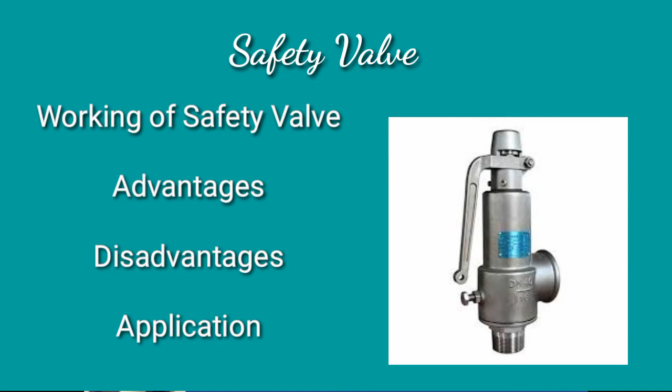In a previous lecture series we had seen what is a safety valve, how the safety valve is working, what is the application of a safety valve, and what is the difference between a safety valve and a rupture disc. In this series now we are going to see what is a relief valve.

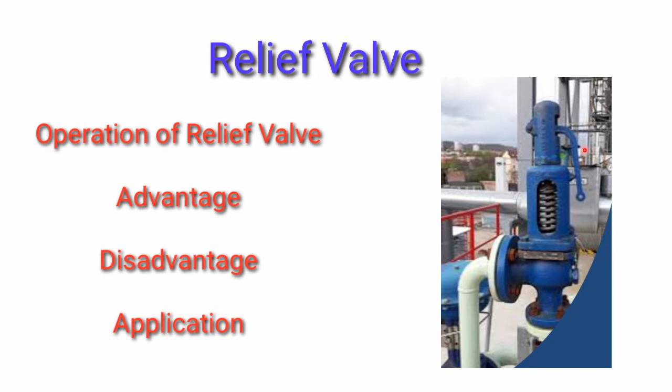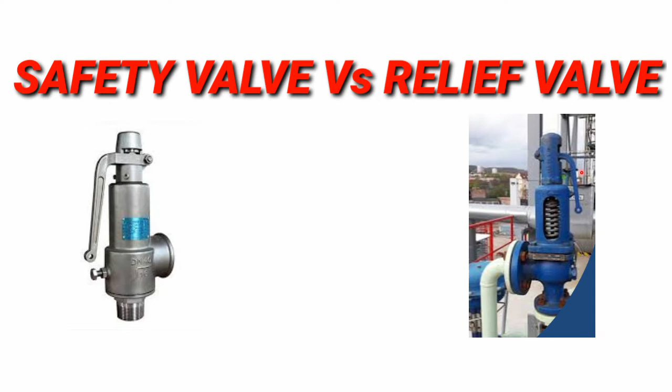We will see what is a relief valve, how it is operating, what are the advantages and disadvantages, and most important question, what is the difference between the safety and relief valve, we are going to discuss throughout this video. At the end I am going to explain it all in detail, but as we proceed I am going to tell you a few points about the difference. So please watch the video till the end. Let me start with this.

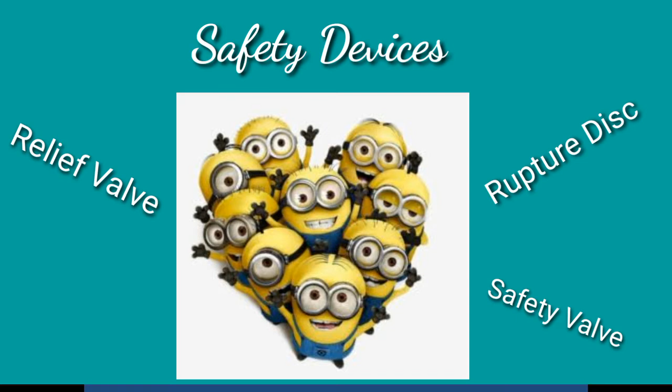What is a relief valve? A relief valve is also like your safety valve, which is reacting to overpressure. So basically the rupture disc, safety valve and relief valve belong to the same family. But the reaction to overpressure is different for all three components. So how is the relief valve reacting? Whenever overpressure is there, it releases the overpressure gradually.

What I mean is, in a safety valve, the pressure suddenly pops out into the atmosphere, and when it comes down to just below the set point, the valve gets closed. But in a relief valve, it is gradually opening and releasing the pressure, and then it is gradually shutting down. This is the main difference between the safety valve and a relief valve.

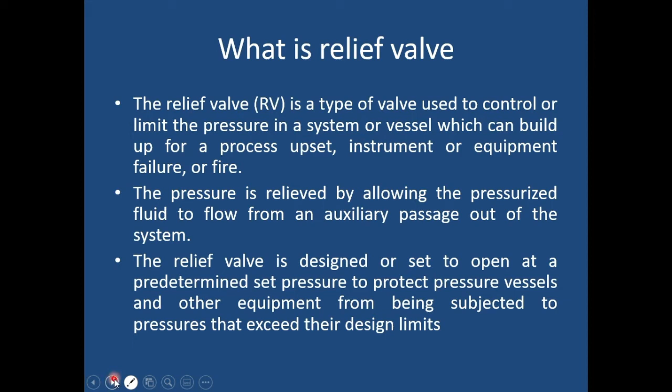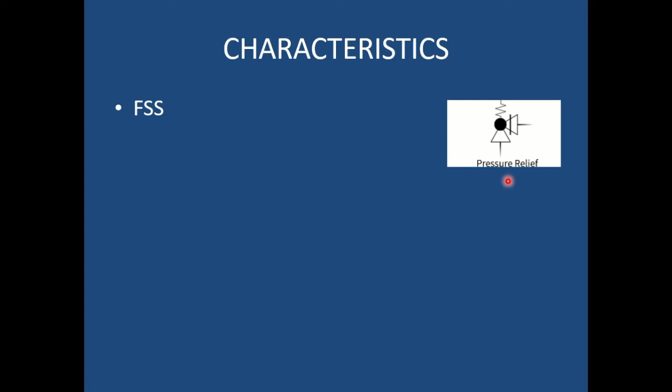Next we will see the different characteristics of the pressure relief valve. First we will see the flow sheet symbol. This is the flow sheet symbol for a pressure relief valve. Now we will see the different types of relief valve, that is conventional spring loaded, balanced spring loaded and pilot operated.

The cost ranges from 20 rupees to 35,000 rupees. Yes, you heard me, it is from 20 rupees. Because if the size of the project is small, small types of relief valves are also available, ranging from 20 rupees. And if the pressure handling capacity is more, or the sensitivity of the pressure handling is more, then the price rises to 35,000 rupees. I got this price from IndiaMART.

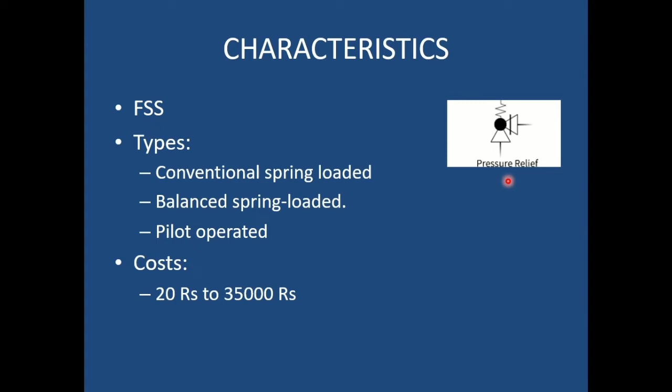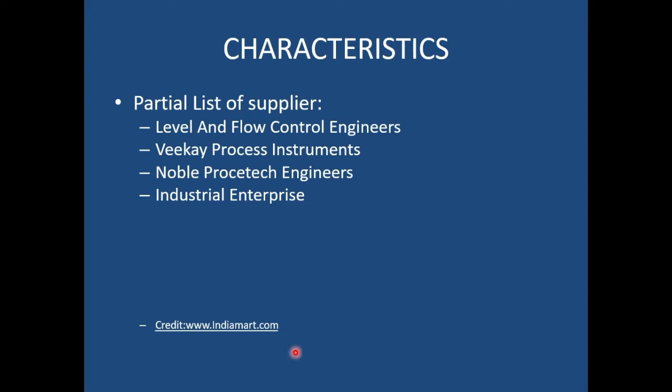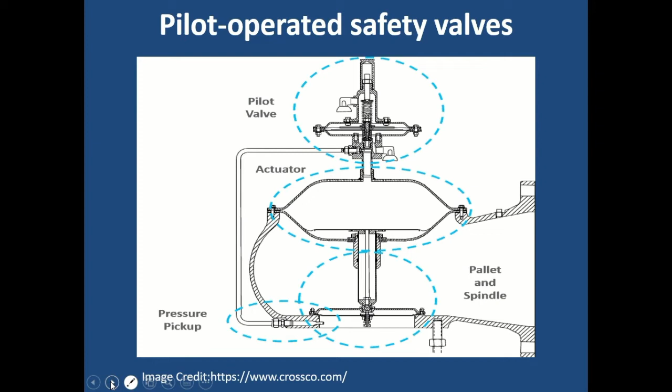First we will see the closed position, which is very easy to understand for the relief valve. Now this is the closed condition. Pressure is input from a certain vessel or equipment where it is connected. As long as the pressure is less, the pressure will be applied here through this pressure pipe on this diaphragm. So if you want to open this control valve, you need an equipment pressure more than this diaphragm pressure. Only then will your valve open into the atmosphere.

So how is this taking place? See, when the equipment pressure rises above the diaphragm pressure here, it will start lifting the disc.

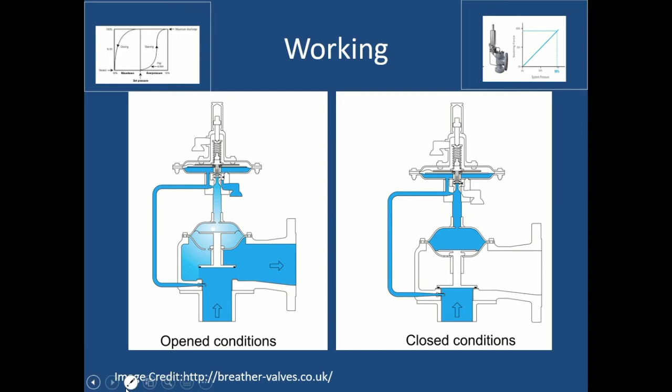As it's lifting the disc, the liquid available inside the equipment will move out of the valve. I can explain with the help of the graph. If you show the pressure profile of the control valve, it will always add an advantage to your recruiters as well as in your exam.

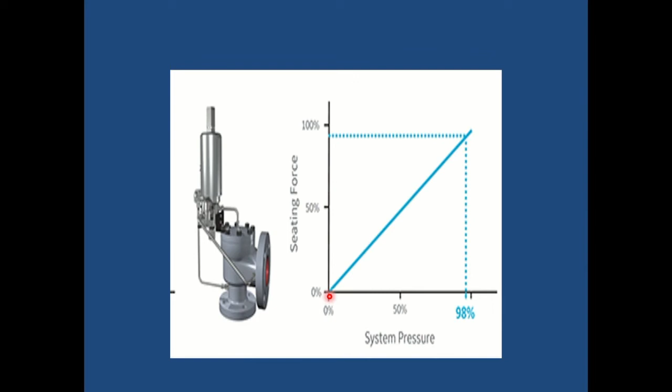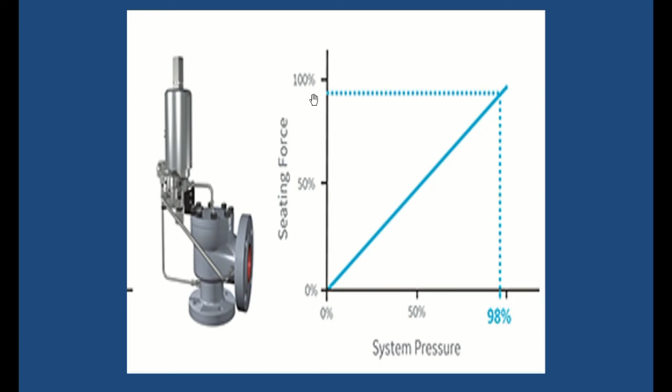The graph is drawn against the seating force versus the system pressure. As your system pressure increases, the seating force will automatically increase, that is, it starts lifting up as your system pressure is increasing. If you observe, the curve is linear, a complete linear curve. At almost 98%, you are getting a 98% opening or seat force.

This is another profile which is drawn for the relief valve. We can explain that this is the set pressure, and this is the lifting of the control valve taking place. At the initial position, the set pressure is less, so the lifting is also 0%.

As your pressure starts increasing gradually, suppose the pressure increases above your set point, that is a pop action taking place. At that time, if you observe, the lifting is also taking place. As your pressure increases, almost linearly your lifting increases.

When maximum discharge is taking place, remember the complete action is gradual, it is not a sudden action. So as the maximum discharge of pressure is taking place, that time the maximum seat opening is there, that is 100%. When maximum discharge takes place, the pressure will now start dropping down.

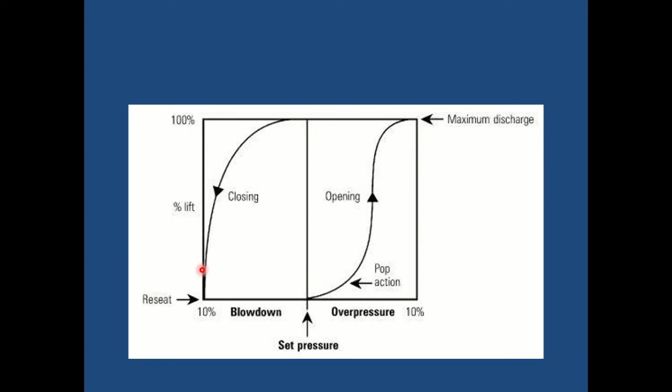It will come to the set point and start dropping down. As it is dropping down, it is closing the control valve at the same time. This is the pressure profile of a relief valve.

More options for controls are available. Some designs allow changing the orifice sizing and the main valve. That means different design features can also be part of this complete relief valve design.

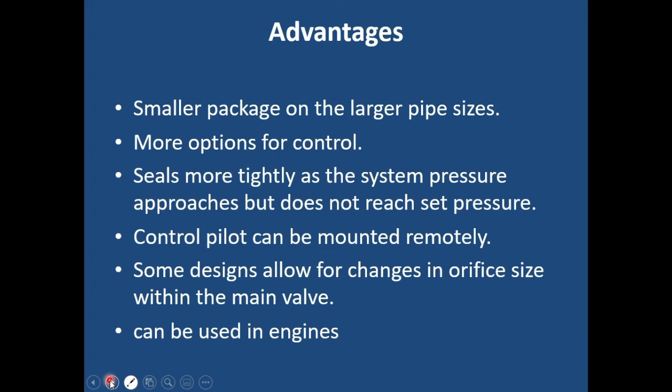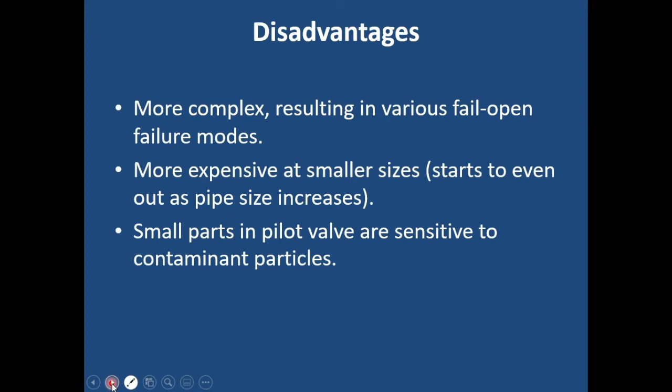Then the disadvantages are there: fail open failure modes occur at various times, and it is more expensive at smaller sizes. Many times it depends upon the sensitivity of the plant, so we have to design accordingly. If you go for a smaller size, it may increase issues in many cases. Small parts in the pilot valve are sensitive, and contaminant particles can be a part of it. So those are the disadvantages of the relief valve.

Application wise, in a low pressure storage tank, then natural gas storage, then an air separation plant or VOC process plant, this is a very popular control valve which is used.

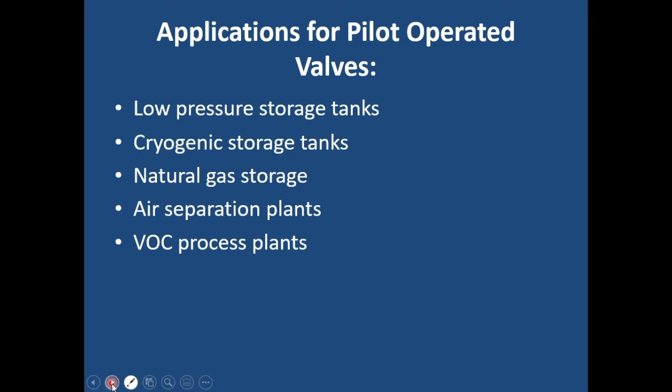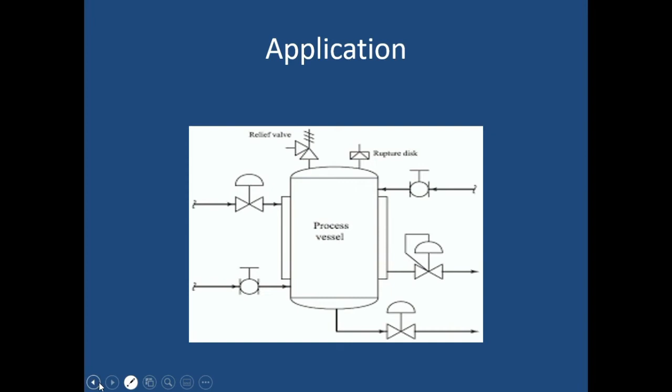Now we will see the most important part, that is the difference between a safety valve and a relief valve. In a safety valve, a compressible fluid is used. This is a very basic difference between the safety valve and the relief valve, that a compressible fluid like gas, vapor or steam is used. If it is there in the vessel, then the safety valve is used.

For non-compressible vessels, we have a relief valve, that is, liquid filled equipments use the relief valve. This is the basic difference: for gas material, the pressure safety valve, and for liquid, there is a relief valve. When an equipment reaches its set pressure, the valve suddenly opens, that is your safety valve, whereas a gradual reaction, where the valve opens proportional to the pressure increase inside the vessel, is your relief valve.

Next difference is, you can open the safety valve manually, but manual opening of the relief valve is not possible. It directly opens when the pressure reaches its set point. It does not open directly; as I said, it gradually opens and the opening is proportional to the increasing pressure.

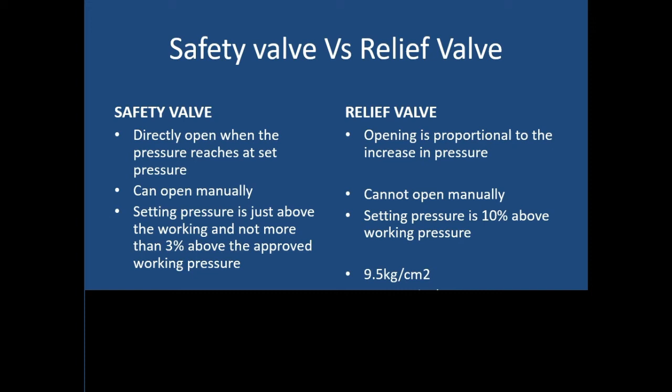Meaning, 10% - if your pressure increases inside the equipment, a 10% rise will be there for the opening of the relief valve. Set pressure is just above the working pressure and not more than 3% above the approved working pressure. That is, 3% above the working pressure is set for that.

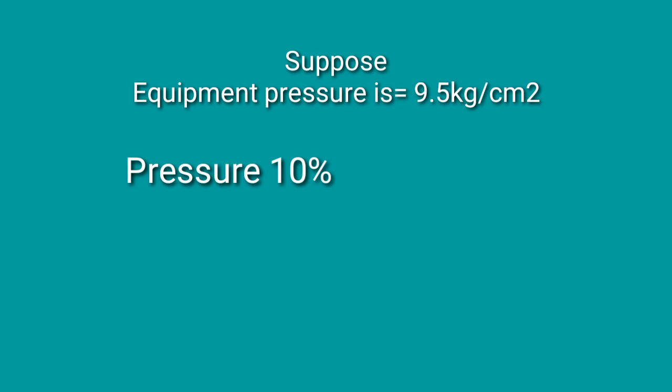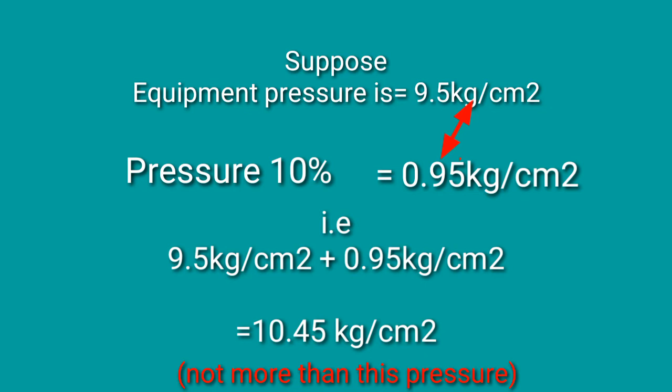Similarly, for the relief valve, the setting pressure is 10% above the working pressure. What I mean is, suppose the equipment capacity is 9.5 kg per centimeter square. For the relief valve, I have to set the pressure 10% above it. So what is 10% of 9.5 kg per centimeter square? Yes, it is 0.95 kg per centimeter square. That means I have to set it for 10.45 kg per centimeter square, not more than that. This is how the setting is done.

Due to the popping action, the wire draw effect in the stream is reduced. There is no popping action in the relief valve, so the wire draw effect is there. That is an advantage for the safety valve in that case.

What is the wire draw effect? It is basically a seating friction taking place - the disc wants to sit on the plug and friction takes place. Suppose there is continuous movement, on-off and on-off - a slight leakage takes place in terms of a line, a wire-like line appears. That is called the wire draw effect.

The valve opening is gradual - there is no popping action in a relief valve. So the wire draw effect can occur between the valve and the seat. First we will see what the wire draw effect is.

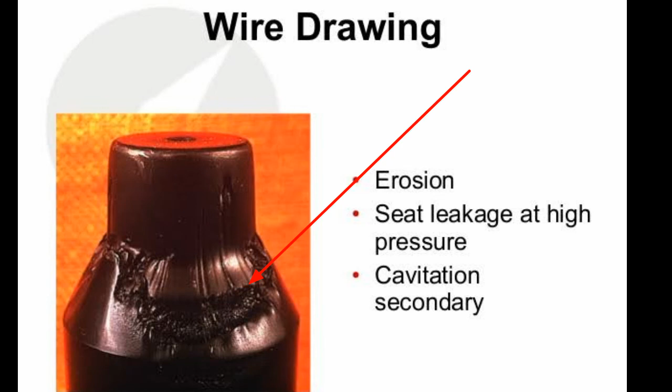Wire drawing is an erosion or scoring of the valve seat and disc material, caused by the seat and disc being very near but not completely tight at the shut-off position. This results in a small liquid or gas flow that, over time, erodes or draws a small groove in the seating material, preventing a full shutoff. Wire drawing occurs faster and is more pronounced the higher the differential pressure across the valve.

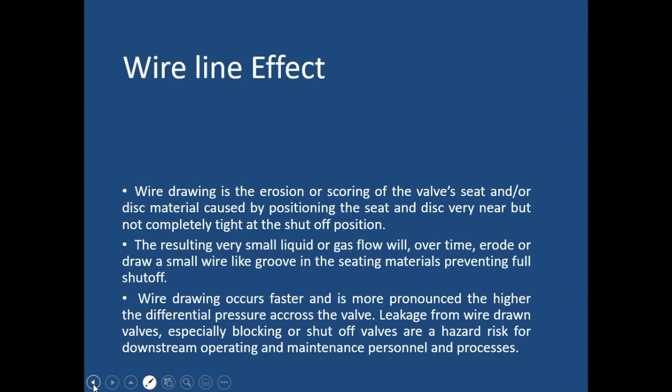The leakage from wire-drawn valves, especially blocking or shut-off valves, is a hazard risk for downstream operating and maintenance personnel and processes. So this wire draw effect is not good for the health of the control valve. Now we will proceed further.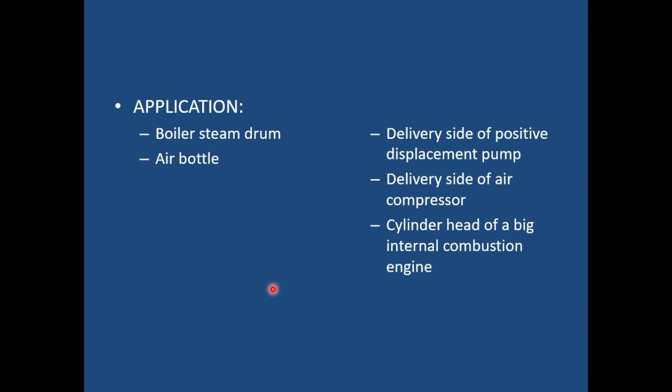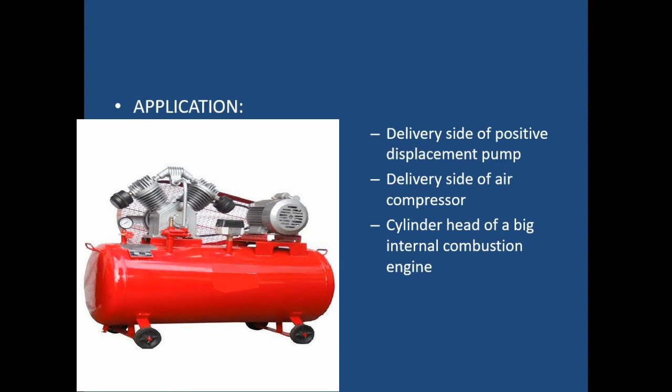For application, the safety valve is used in a boiler steam drum, which is more popular for boiler safety operation, and air bottle operation. Whereas on the delivery side of a positive displacement pump, delivery side of air compressor, or the cylinder head of a big internal combustion engine, there we use the relief valve more.

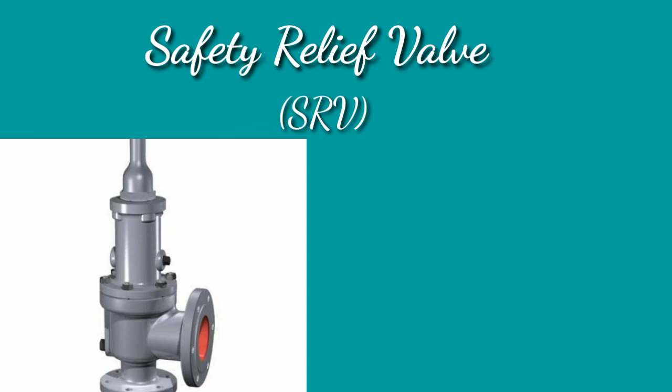Now next comes the safety relief valve - a combination of the safety valve and the relief valve. So what do I mean by the safety relief valve? I can say it takes the good advantages of both valves. For example, the safety valve is meant for compressible fluids and the relief valve is meant for non-compressible fluids, that is liquids. My safety relief valve can work for liquids and gases both. That is an advantage of having a safety relief valve.

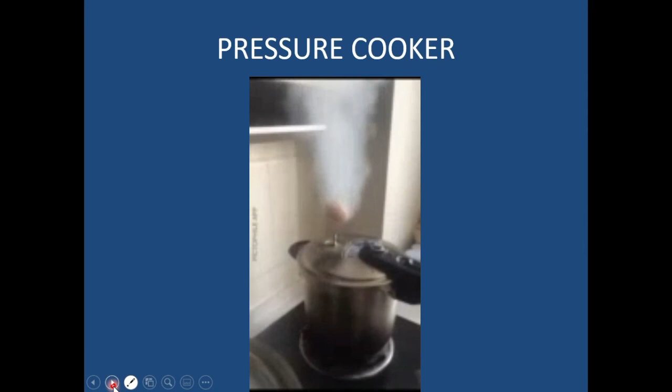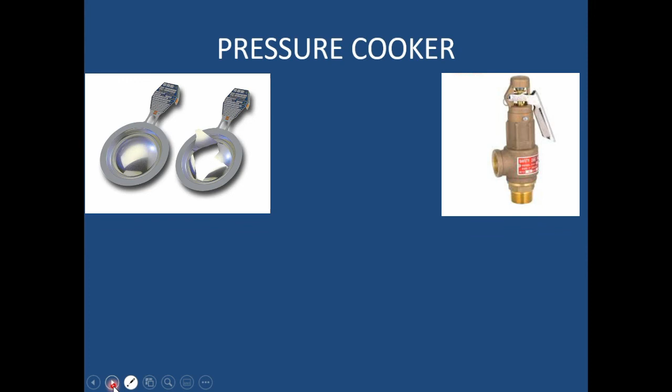Next example is a pressure cooker. This is a popular question always in students' minds - whether in a pressure cooker, which type of valve is used. Is it a rupture disc? Is it a relief valve? Is it a safety valve? I open this question to you all, after learning the series on the safety valve, rupture disc, and relief valve. Now please answer me - what are those valves? Are they valves or not? Or if they are valves, then what types of valves are they? Please let me know, I will be waiting for your answer.